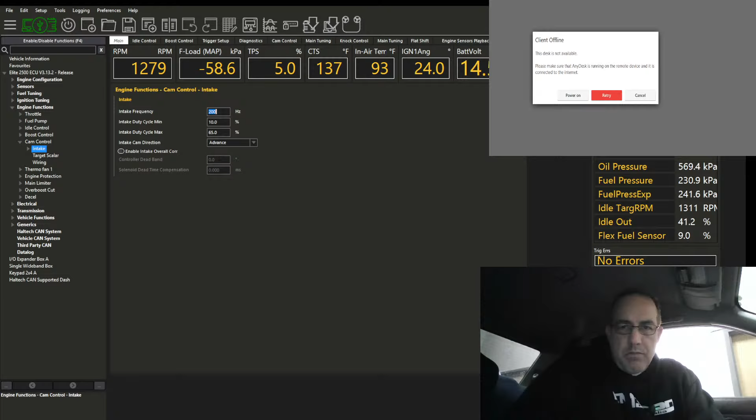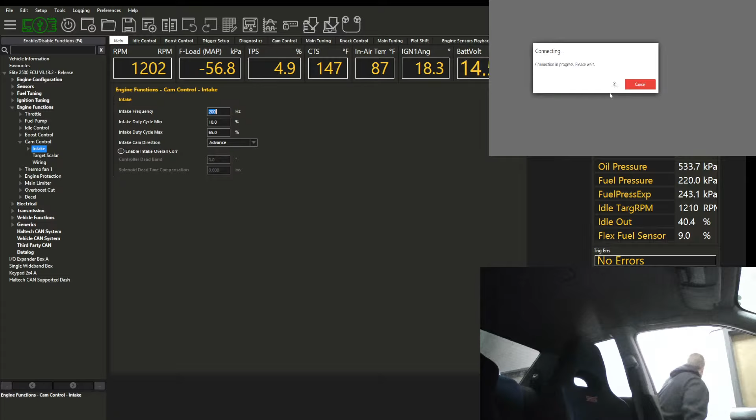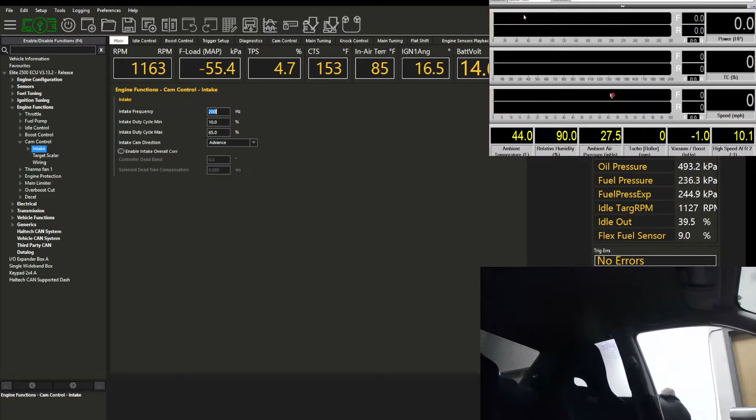All right, let me get the Haltech fired. Oh, it's already on. Where is the Haltech display capture? Chrome M Tune. Here we go. Alrighty. And then Dyno computer, get that fired up. Woo! All right. Ah, shit. Chewy. All right.

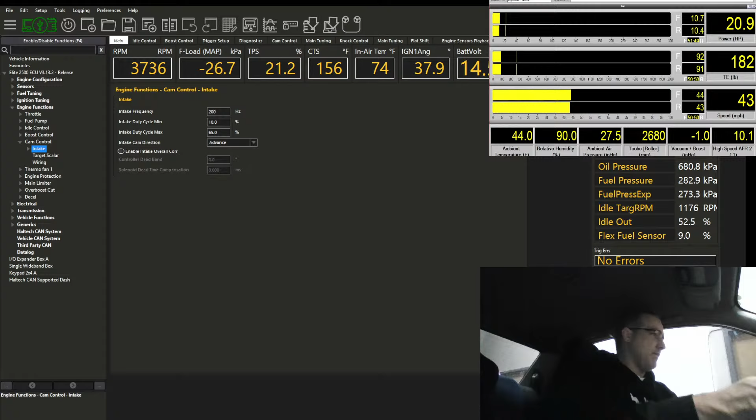Coolant temp's 167. Oil pressure is 90. Wow. 96. Okay. Oil temp's 145. So I appreciate the owner of this car buying all my parts. That was pretty nice of him. It runs pretty good. It's on a Haltech. You know how much I do not love Haltech. It's had some issues that are very Haltech-isms. I despise Haltech idle control. It just isn't where it's at.

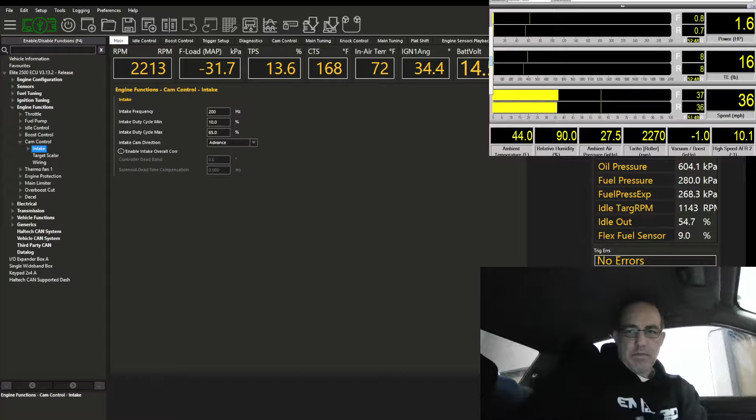We're going to do a speedo cal real quick. Okay. We set that in the dyno. Oh, it was close. All right. Want to look at the cam timing a smidge. I got it kind of high, I think, and that mid-range felt a little flat when I was accelerating right there. So I may have it just a smidge too aggressive right there, or it was hunting. I don't know. So I want to check atmospheric here, 80-25. Like bad. Might have just been to 5. Okay.

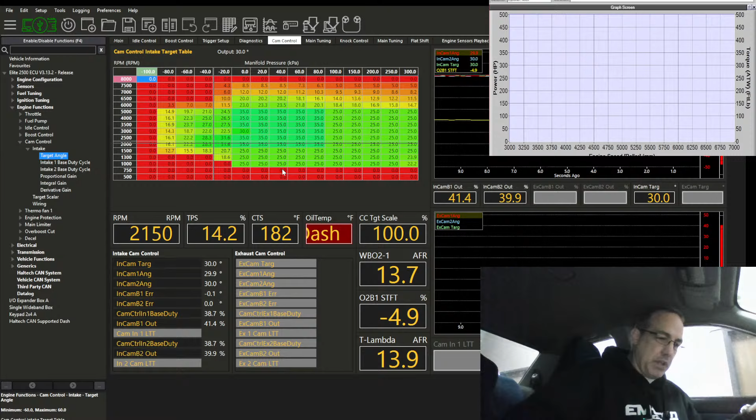9%. Okay, so we're on 1700s right now. ID 1700s. Not the new 1750s, just the older 1700s. It's fourth, right? Yeah. It's got the CAE shifter, which I'm not a fan of. This one at least is installed really well, so I give him big props on that. He did a good job with that, and it shifts the best of any of the CAE shifters I've ever had the displeasure of messing with, because a lot of them just don't do well. I know you got to really set it up right, but even then, there's something missing. But this one's actually the best one. It looks like it's the newest version though, so perhaps the other ones causing problems were the older version. But anyway, so here we are.

I'm gonna do a light pull. Dyno's grabbing it. We do a light, low throttle pull, just see how the air fuels are through like 2 to 4 pounds. It would help if I remember to turn off the rev limiter for braking. Turbo is loud. Okay, so we were adding some fuel in there. It was at 10% fuel right here. That means those can move some air for sure. I got 8 pounds-ish of boost here, and we're at 4,000 with 35 for my intake. So a lot of overlap right there, and definitely a positive pressure ratio across this thing. It's just blowing a ton of air, so I would expect a high VE there.

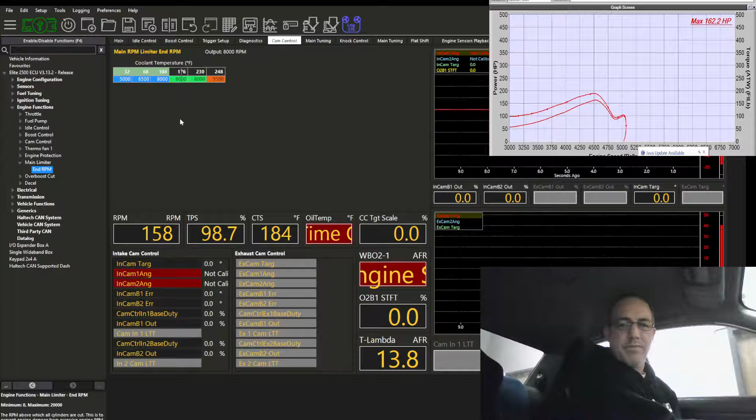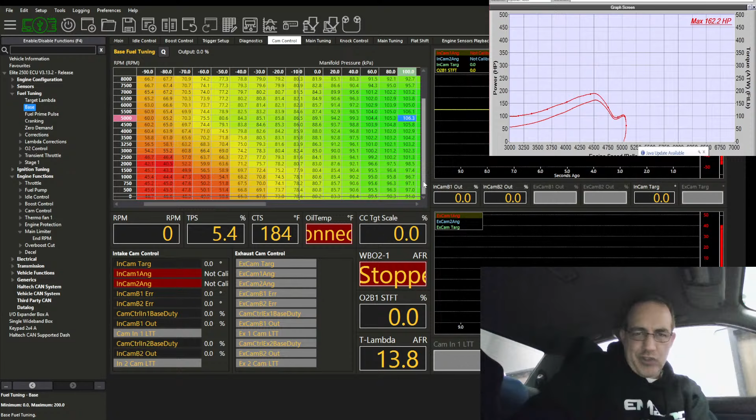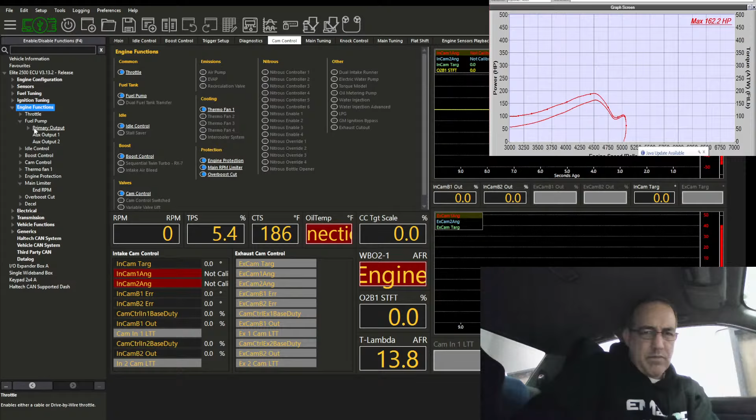Yep, something's happened. What did I mess up? Oh, sweet. What else changed on me? I'm in VE. That's right. On the VE map reference 300. Mm-hmm. What did I freaking run into while the car was bouncing? That's gonna be a fun one. Would have been that. I didn't go there. I didn't go there. Wait, try and see if the fuel pressure goes up. What are we doing here? Damn it.

Okay. Shoo. All right. Got it running again. I got to figure that out. And I don't know what I hit, but that's one thing that sucks with the dyno, right? I must have bumped something with all that action. What turbo is this? I forget. I think it's a G38 800, the new one. Let me double check. At this point, I'm not too concerned about it, right? 'Cause I'm not in the high power yet, so I don't always remember what they are. Yeah, G3825. Okay. Hey, Kenneth.

Alrighty. Now I gotta see what I messed up. I hit something when she was bouncing away, and I was hitting these damn arrow keys. I'm used to navigating with arrow keys, and that's not the case for this one. I wasn't in that menu. I wasn't here, though, for a little while. I didn't mess with that. I could have messed with that. Two banks, intake only. One solenoid per camshaft. 80. No, that's fine. How about here? That's all fine.

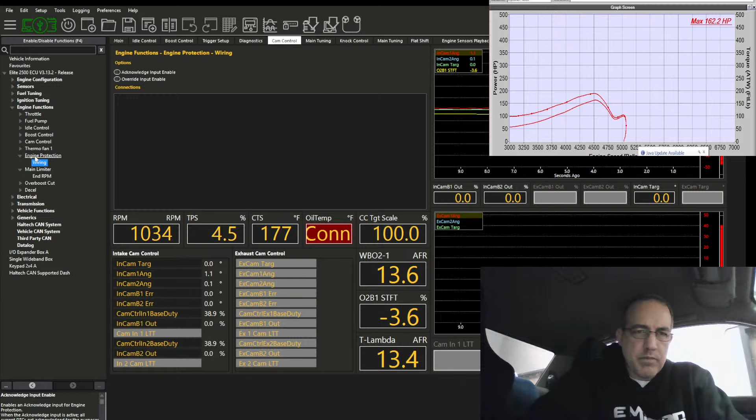So, check my check engine light. Drivetrain speed diagnostic. Okay, I don't remember doing anything there, but maybe I hit something there. All right, well, that's it for that. Let's just carry on. Whatever it is should rear its ugly head at some point, right? Or maybe I just gotta work on the hot start.

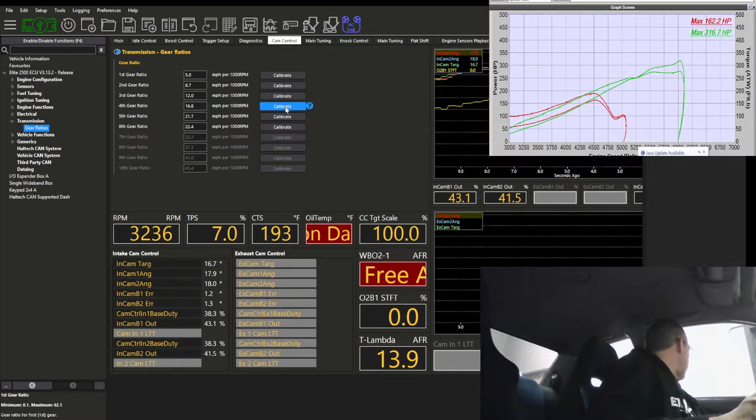All right, so my gear ratio is off a smidge. I'm gonna adjust that while we're here. We're in third. We calibrate that. Go to fourth. Calibrate fourth. Same spot. Boy, she woke right. Wow. Thing woke up. Let's go to fifth. Calibrate that. Still does not recognize I'm in fifth. The dyno's trying to do a pull right now because I'm going too fast. Wow, Haltech, you are not doing well.

It's still bouncing around. Wow. It feels like the center diff in this thing is toast. That's what that felt like just now. I don't think the center diff works in this thing.

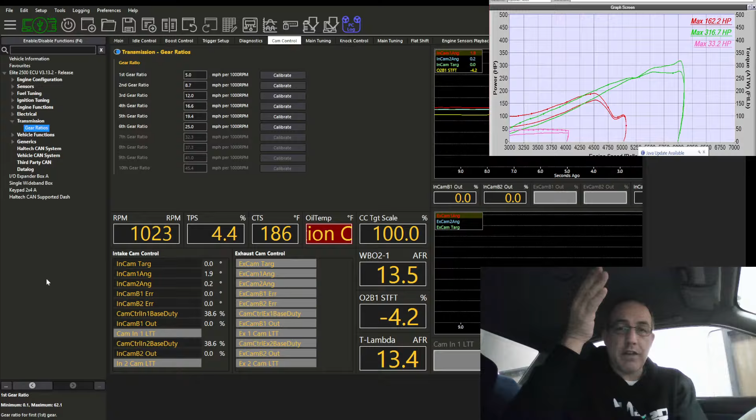I do like that. But it's glitchy because you click on it one time and it does something one way, and then another time it does things another way. Sometimes you got a log open, you double click on a parameter and it automatically throws on a trace. Other times you double click it and fucking nothing happens. Just magic. Sometimes it decides to work, sometimes it doesn't.

So that sucks. And then the fact that I can't use the number or arrow keys to go through here, that's dumb, that sucks. And then this whole gear ratio thing, not working at all. That's just crap.

I mean, I don't say at all, but the fact that it's bouncing around no matter what I put this one at means I potentially need to filter the input for engine speed or vehicle speed, either one, right? It could be RPM or it could be vehicle speed. Might need a filter. And then the filter, if there is an option for one, might take out some of the spikes.

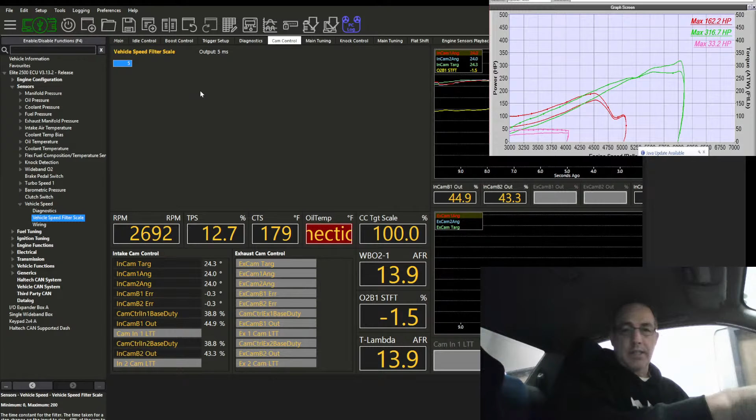Cams are following really well. Happy with that. Cams are following target right on, which is good. I spent a lot of time this morning working on that, trying to get the cams to follow the target. Another thing, I don't like cam control in the Haltech. I don't like how they auto calibrate, especially with the Subaru, because the Subaru has this thing where it will frequently change the phase of the cam sensor. It's some weird thing that they do.

I need to take this off of sample. I don't want to sample. Let's go here. Oh, load. Okay, fourth gear is stable on the screen. Fifth gear's not reading. Still not reading. Yeah, so whatever. It's just more Haltech bullshit.

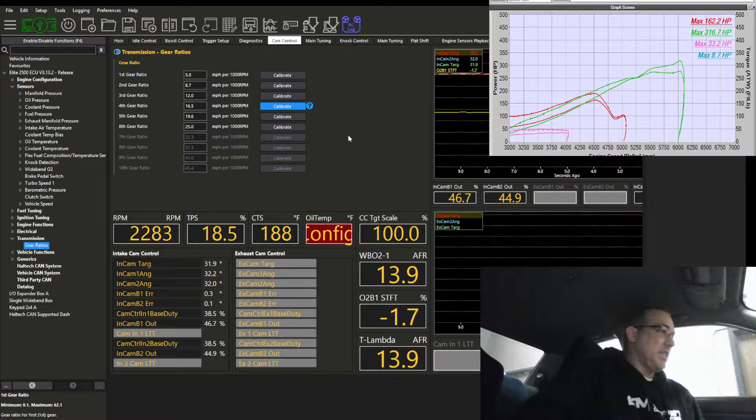The speed looks like it could use a little more filtering though. Let's try that. Maybe a little more filtering. See, I'm gonna do a big change. 20% load is a little much for this little engine right now. Yeah, see, 2 and 3 are jittering. 4 is steady. 5's jittering. 6 is jittering. All right. Go bigger on the filter.

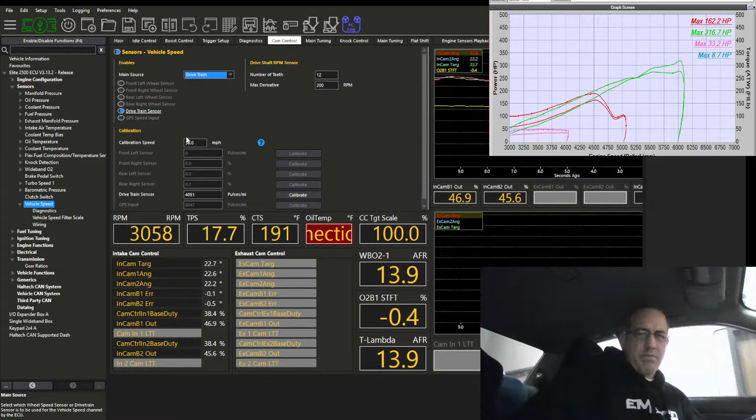Get a little engine brake in while we're here too. Gonna lower this down to 10. Okay, 4 is reading. 5 is not reading. The speed is still pretty jittery. I set this at 30 miles an hour and double check the calibration on this too over here. Speed 30. Okay, up against that. Okay.

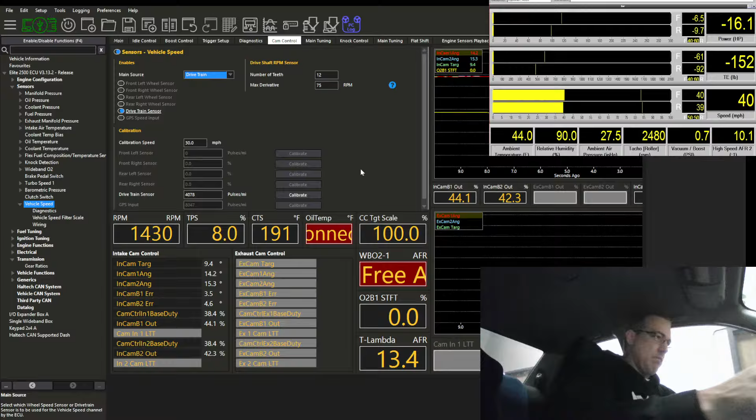Let's make that longer. No, wait. The maximum derivative. Let's go with 75. Okay. And I'm going to turn off my speed control, go back to load, set this around 10. So come back and try and see if the gear works any better now. It's more stable. Wait, what gear was I in? This is third. It told me the wrong gear. It lied to me. Third. Okay. Oh, now it says second. Now it says fourth. Let's calibrate fourth again. Okay.

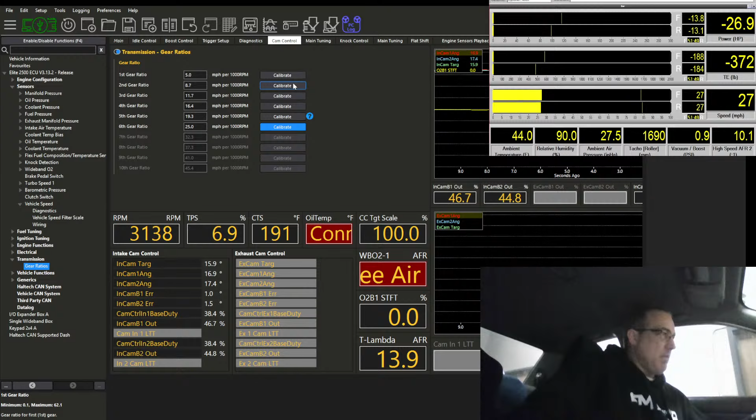Let's do fifth now. Nothing. Sixth. Nope, it says fifth. Do second. Rolling downshift into first. Nobody ever does that, right? First. First works. Second, for first doesn't work. Second to third doesn't work. Fourth gear kind of works. Fifth gear doesn't work. I mean, if I filter this anymore, it's going to be over a second. All right, 900 milliseconds.

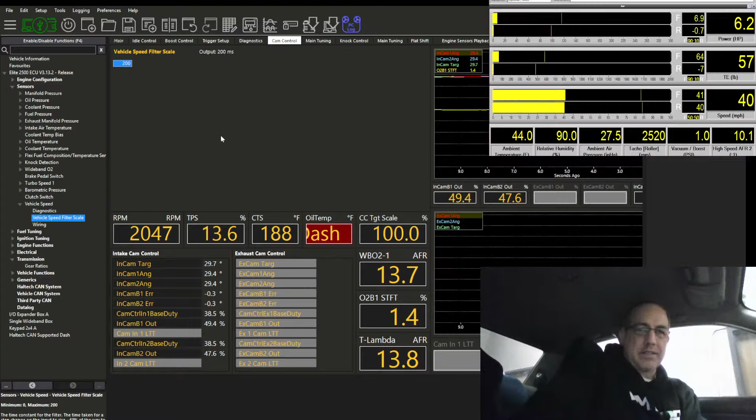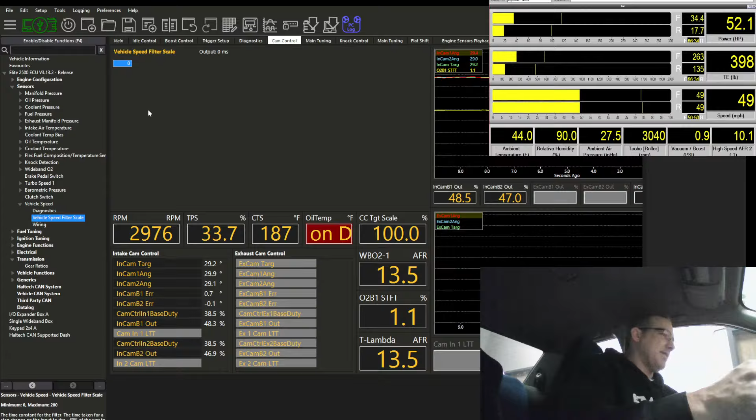Third. Nope, says second. Oh, 200 is the max. Yeah, 200 is the max. 0 milliseconds. Nope. Not working. Nope. I killed it. I killed it. Was I in gear? No, I just killed it. Man,

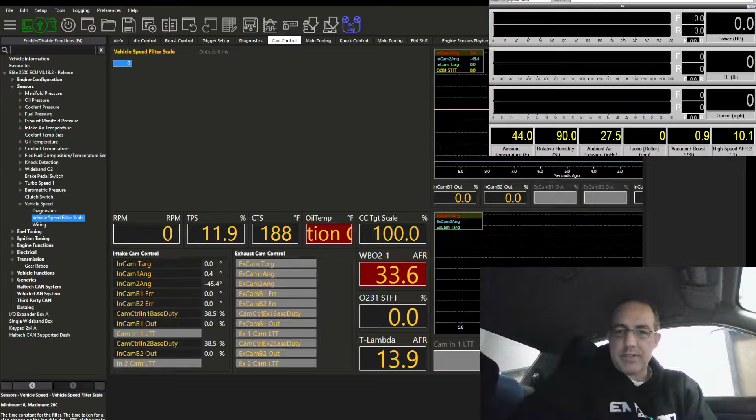no. Do you like the layout overall? No, I do not. I do not like Haltech at all. Like none of this software do I like. I hate the layout. I hate the fact that every time I open it, even if I change something, I gotta reset my gauges, even though I've saved them. I hate that stuff disappears off the screen all the time, like this crap. I gotta hide this, and then I got to get that back. But I don't want that. And this pops up on its own. I don't want it to fucking pop up. I don't want to see that shit.

Cam sensor, not detected cam sensor. Yeah, that's the other problem that he's been having too, is the cam sensor. Like I said, another Haltech thing. Cam sensors just stop reading sometimes. Fuck, it's so annoying. All right, so unfortunately, this sucks balls. So it died because it didn't see the cam sensor, so it didn't get home signal. So what we can do is I can set my trigger so that it doesn't care about the home signal after the engine has started.

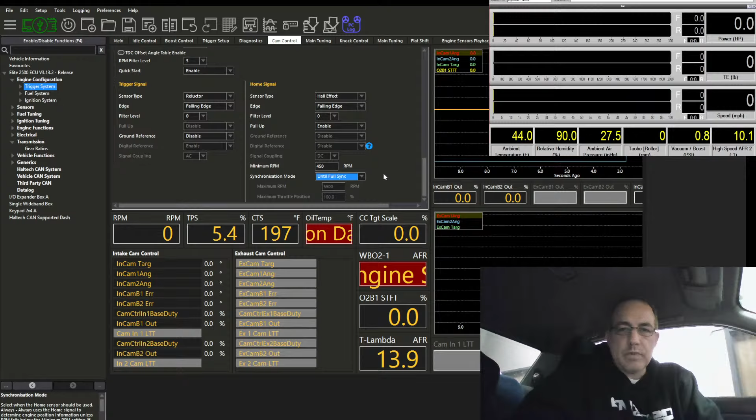See how here it syncs always. We don't need that. Yeah, yeah. Can do that. Now, this will stop it from going wacky on me. You probably choose one filter. Maybe one filter might work. We'll see if that works or not. And then it says minimum RPM is 450. I feel like I want it to be a little lower. Let's go 350. Like that. Hit that again. Okay. No cam trigger.

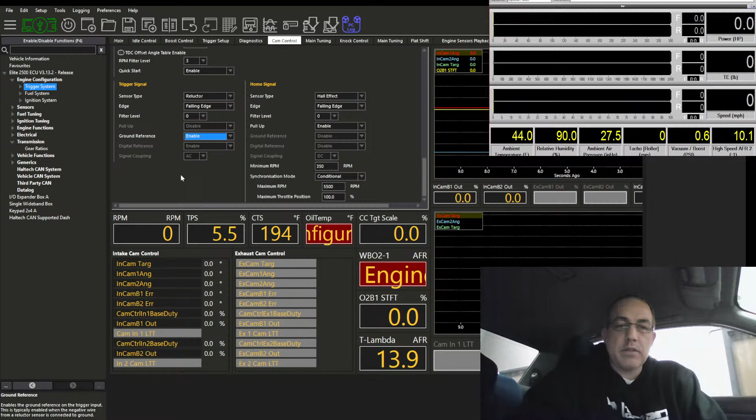Boy, something's angry. Oh, look at the cams dropping out again. See that right there? Cam signal dropping out. Conditional would be nice, but that puts an upper limit on it. And the problem I'm having is at the lower RPM, not the upper RPM. And sometimes you'll get it up top. This actually should be enabled there. That should be enabled there. Unless they wired it funny. But usually Haltech, they run that to ground. All right, so there we go.

What the hell now? Bank one not detected. Okay, so I've lost both of my cams, basically. Ah, that's so annoying. So annoying. Oh, my fuel pressure's lagging.

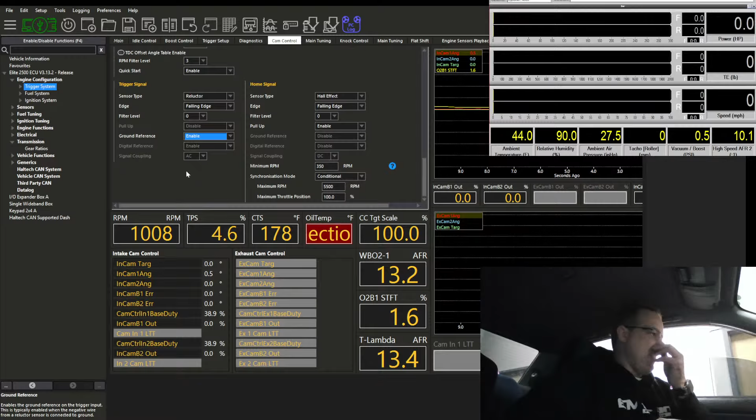Okay, I think we're good. The oil cooler is not working as good as I would like it to. It's currently at 210, and we haven't even been doing much to it. Fans are running, they're on it. Well, they're not on the cooler itself, they're in the engine bay, and the cooler is also in the engine bay. I honestly don't understand the way the cooler's set up, because it's just sitting in the engine bay.

I don't know if the owner plans on putting a scoop on it, or maybe there's a fan on it or something. I don't know what the plan is with that part. I should ask him about that, because the oil temp is much higher than coolant temp. Okay, and because of that, pressure started to drop. It's good now though. I'm gonna see what fuel pressure regulator this thing has.

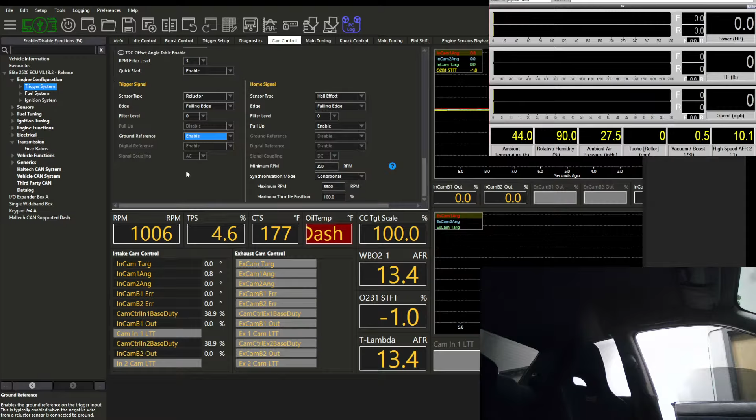Oh, it's got the Radium too. Man, I hate that thing. I need to hold this hood up. Okay. When you turn the key off, this fuel pressure goes to zero like that. It just drops off. And so if you don't start the car during the crank prime or during the fuel pump prime, you're screwed because fuel pressure falls off too quick.

Or alternatively, when you crank on it, the pressure takes a while to come up on this thing. It's like... and comes up. So I've been telling people for a long time, stop using those Radium regulators. They suck. I like Radium products, but their fuel pressure regulator is garbaggio. It is so bad.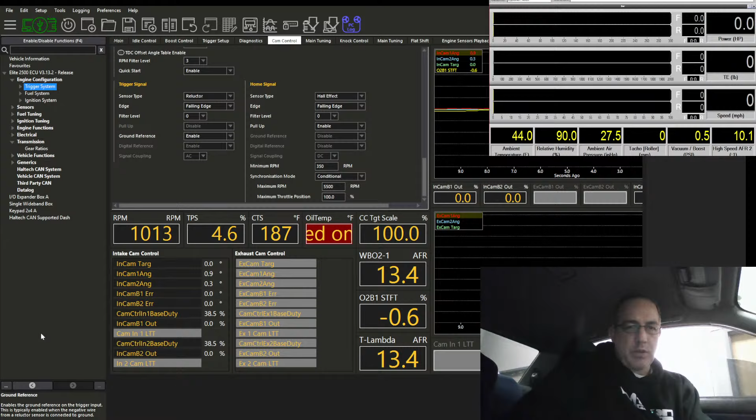Okay, oil pressure starting to come back up now as oil temp drops. I opened the hood, put a little thing on it so that the air can get to the cooler, and it looks like it's helping a little bit. So that's good. So let's see how this works. Let me go back to my chat here.

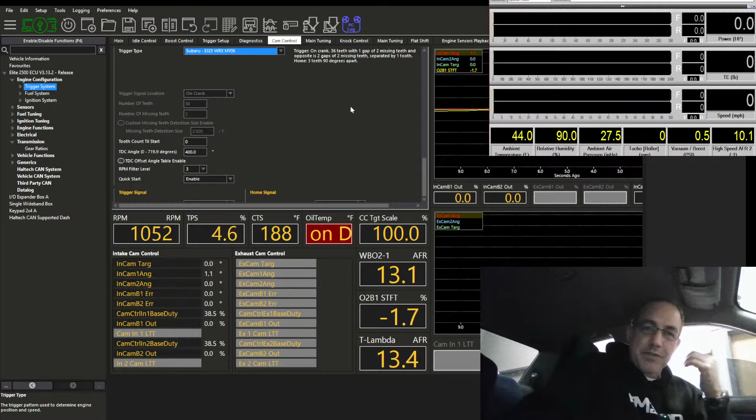What's up, guys? Hey, Mark. Haltech is angry. Haltech is crap. I don't want to talk trash. Tired of talking trash. Trying to be positive about stuff. But when you struggle because of a system being poor, it's frustrating and it makes you angry. So I get angry because it's far less than ideal.

Okay, so vehicle speed works, gear indicator doesn't. It kind of works. And unfortunately, I have nothing else that I can do to make it any better. So the owner is SOL on that one.

Oh, the heater was on. No wonder I was baking my balls off in here. It's 40 degrees outside. I didn't realize the heater was on.

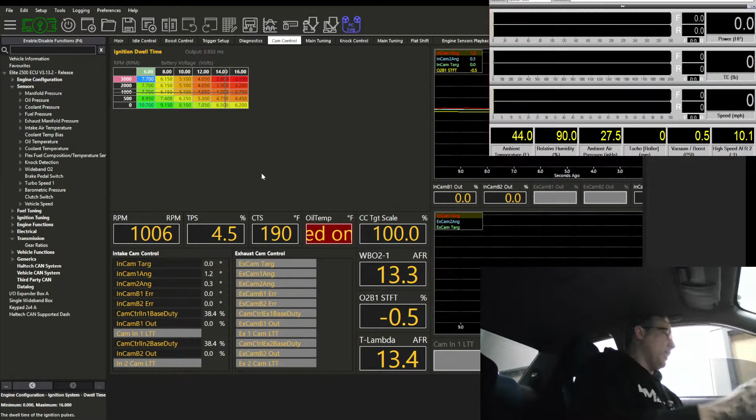Okay, so I'm gonna just abandon that now. Cams seem to be tracking. They do fall out at idle sometimes. Hopefully that can be okay. But let's go with another low boost pull. Oh my God, I'm sorry. I made them the same. Okay. All right. Take it over to the dyno. We will do a low boosted pull again.

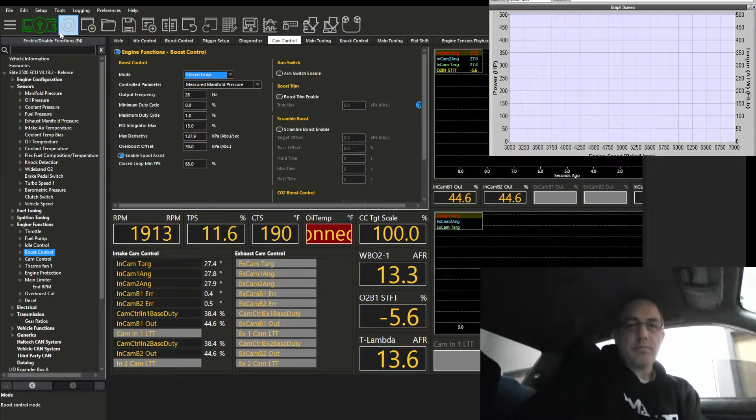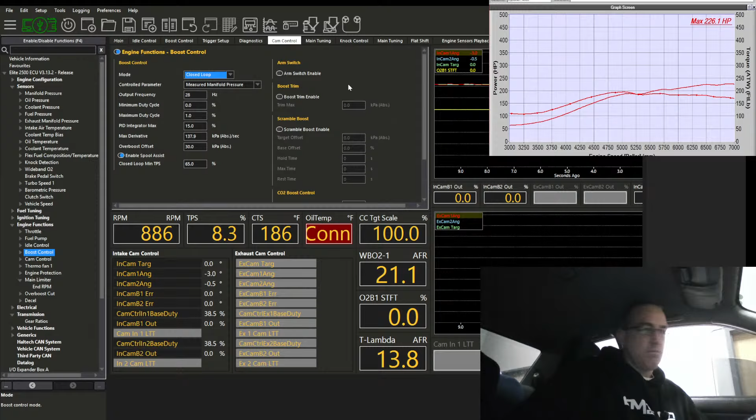I hate the logging on the thing too. I fucking hate Haltech logging. Okay. Oh, losing it again, huh? We good? Car?

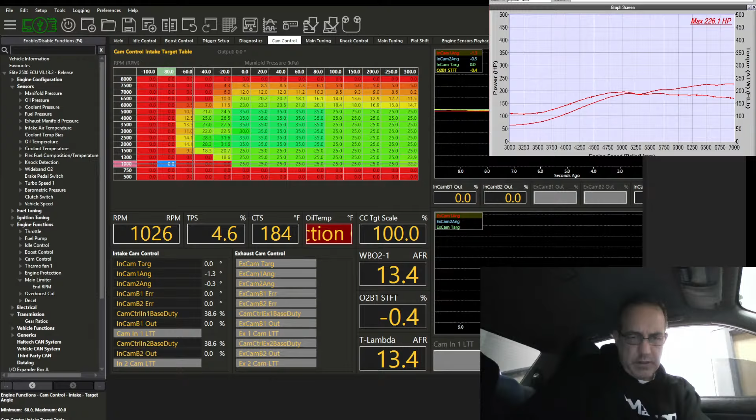Log viewer time. I don't think I have that capture for you guys. Let me bring it up. I know I told it to do it at one point. Here we go. There she is. All right. So usually, if I double click on something, it should plot it in a trace to the right. So, let me just find the thing that I want to plot.

It's in here somewhere. Okay, we'll start with RPM. Come on. Two clicks. Nope, not this time. This time it doesn't let me do it. So annoying. All right, manifold pressure. Oh, that went to new trace. Okay, that's good. And that manifold pressure was what?

65 kPa, and I was letting off on the throttle a little bit, so 8 to 7 pounds here, 9 to 7 pounds, somewhere in there. Yeah, 8 to 7. It's for you metric or SAE peoples. I hate what they call it. This guy, Wideband O2 1. 79, 78, 77, 78. Okay. That looks good. What's my target though?

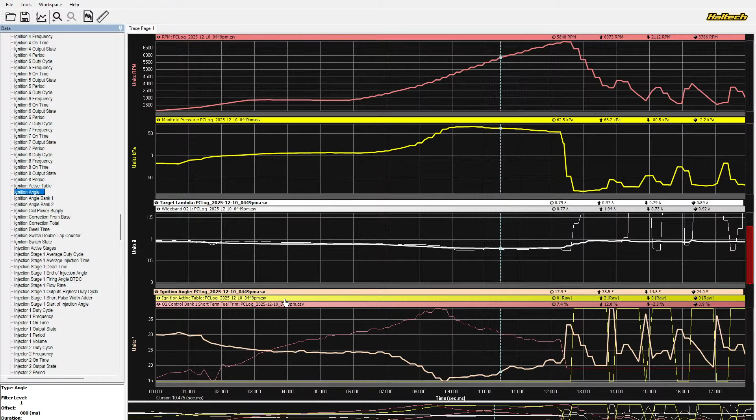I want to look at my ignition advance. I want to look at my ignition angle overall, this guy, and we're going to put it on this table. Why does it keep changing on me? There we go. Remove. There we go. All right, so timing came up to 14 degrees at this 8 pounds. So it's very conservative timing right now for 8 pounds, but that's good. That's what we want. Timing is 24.5 as we're coming in through atmospheric pressure. That's a little conservative for this engine, so I'll probably add 4 degrees through this area right here.

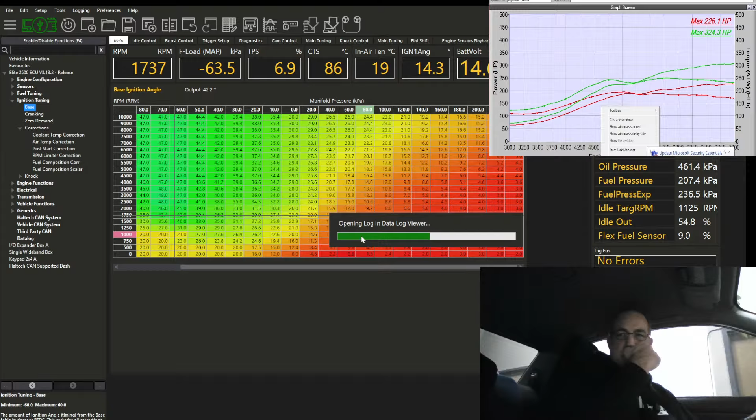Come on. You can do it. Lost sync again. Yep. Lost cams again. It's so annoying. I am going to put an EMtron in this tomorrow or Friday, and I'm going to test it because the cams just keep dropping out like this, which is classic Haltech, happens all the time.

But it's still stupid annoying, and I want to see if it's a Haltech problem or a car problem. So I'm gonna plug an EMtron in this on Friday and see if the cams track. And then I'm gonna enjoy a good solid hour of tuning that just works. Unless the cams screw up. If the cams screw up on the EMtron too, then obviously there's something wrong with the car.

Whether it's some of the wiring modifications that he made, because he changed some wiring stuff with grounds, or what, I don't know. But I got to try something else because the guy's not gonna be happy with this. And he was mad at me for saying that Haltech is crap, but this cam issue is like every Subaru almost. It's ridiculous.

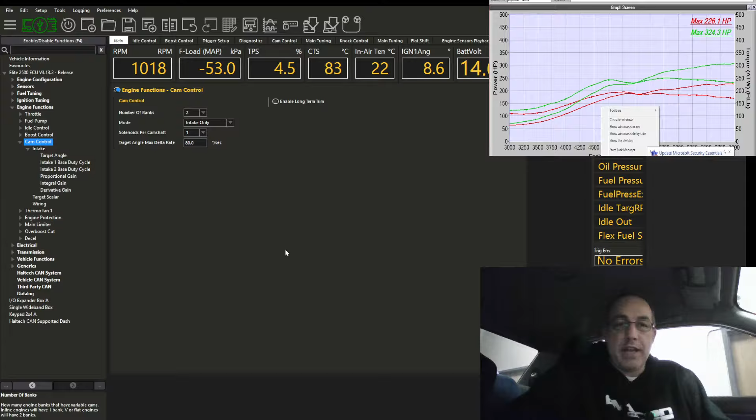But you can watch it though. I think it's on this page, right? I think it's this page. One of them, of course, this is in the way again. One of them shows you when it's calibrating the cams. I think it's this page. Let me see. No, it's not on the screen. I think I have to add it.

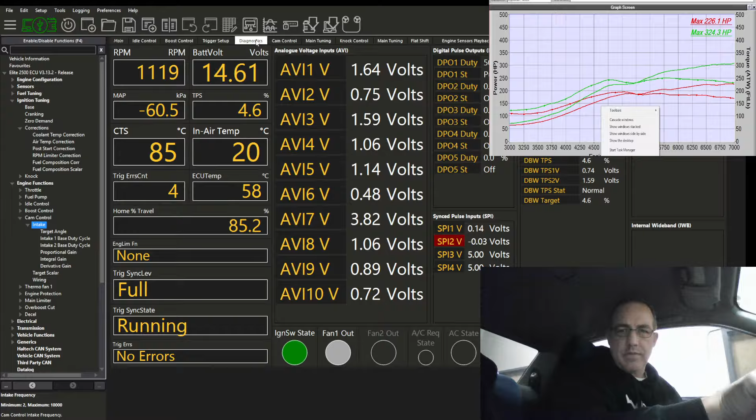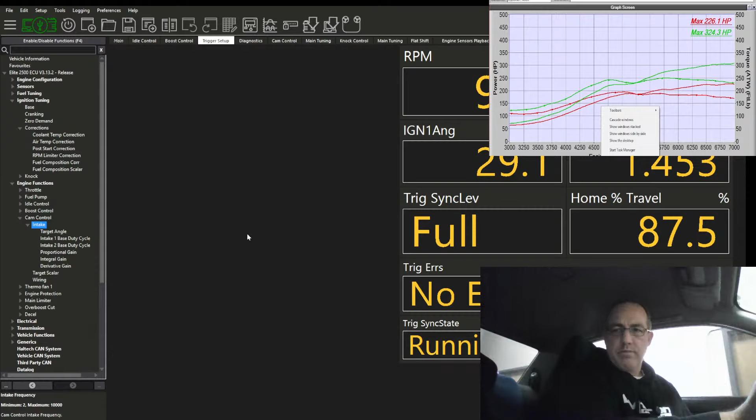I think I have to add it. Let's see, unless that's one of these. It's one of them. When you click on it, it brings up another window. And it's diagnostics. This one. It's one of these. I gotta find it. This one? I don't know. No, I don't know what screen it's on. Like I said, I may have to just redo it.

Anyways, one of them, it says calibrating, and it goes through and measures where the cams are at. But when that sensor moves, the calibration goes out of whack. And you can see it here. You watch it here on this window, all of a sudden the cam will go boop, like down to nothing, or it'll pop up really high. One of the two, based on what side of that phase change we're on.

It'll either all of a sudden go, whoa, okay, we're 30 degrees one way. Because it changes, I think 30 degrees is the distance, if I recall correctly. They go from like 60 to 90 as the last trigger before TDC. So before TDC, it'll go between 60 or 90 degrees, and then it flips out and thinks the cam is 20 degrees advanced, but then all of a sudden it gets another 30, so it thinks it's 50 degrees advanced. Or the other way, it's at 20 and then it loses it to negative 10 or whatever. And so you'll see this big swing in cam position all of a sudden as that thing changes phase. Like it happened by foot.

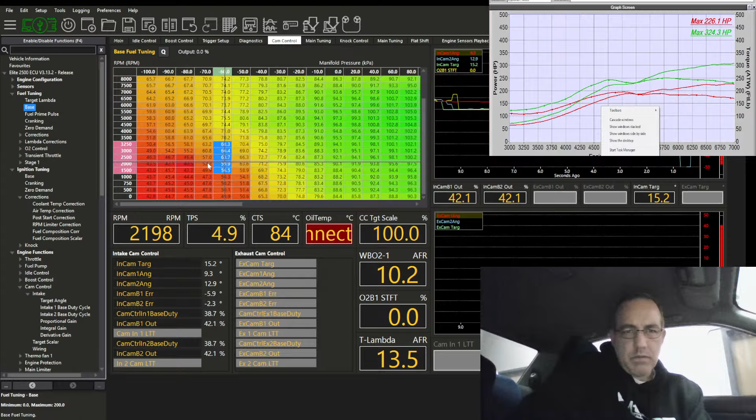Let's see. Oh, yeah, lean spot right there. Does not let me put just a tiny bit of throttle into it. Let me find that spot. Okay, it's right there. So this zone here needs more fuel. There you go. Oh, you see it. See that spot right there where it dropped off? That's where it changes phase and then loses itself. There you go. A little more throttle again. See if I hit that spot.

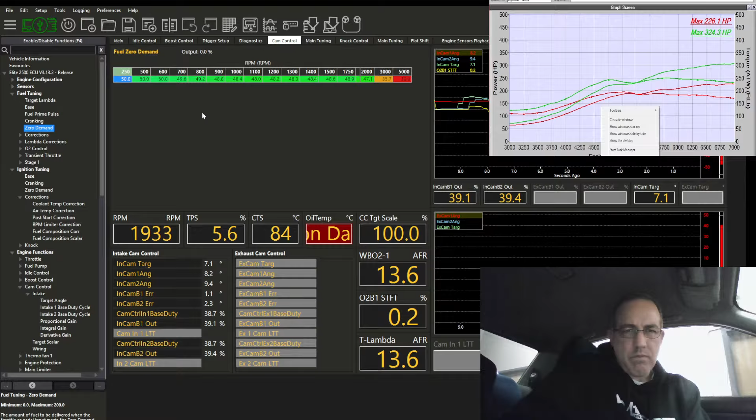Might still be in the zero demand map for some reason. I don't know why it would be, but see here? No, not actually in there. Oh, maybe I am. Let's give this guy right here. I shouldn't be in the zero demand because I'm giving it foot, giving it throttle.

So with that oscillation and the fact that I add a bunch of fuel right here and it's still oscillating, that means I'm probably in the low pulse width of the injectors because I am on pump gas right now with 1700s, and that's problematic. So I'm probably at the low pulse width of the 17s. I might even have my target lambda a little too lean right there. See, now we're at 13.9 as it comes up. So that might just be a little too lean as well at that light load.

Yeah, that's probably just too lean for injectors this large with that small of a pulse width. But see, now we're pulling fuel out. Not just added a bunch of fuel there, so.

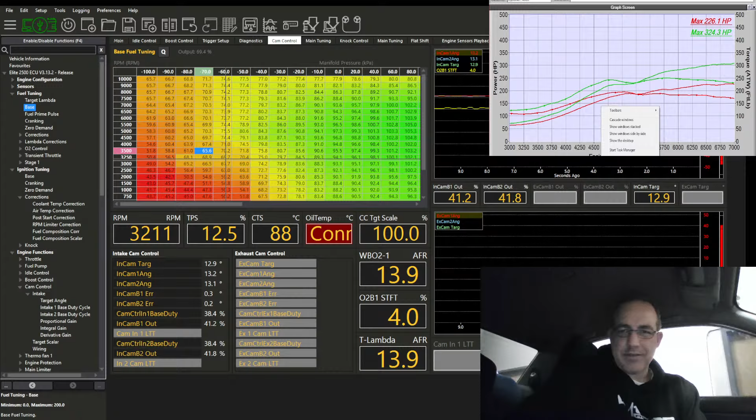Let's go back to this last log I did. I didn't review that log. I was trying to get the idle to stabilize. My rolling idle is a little too aggressive. You see how much it's adding idle as I'm rolling. So let me adjust that real quick, and then we'll do that too. For that log. Idle control, idle up.

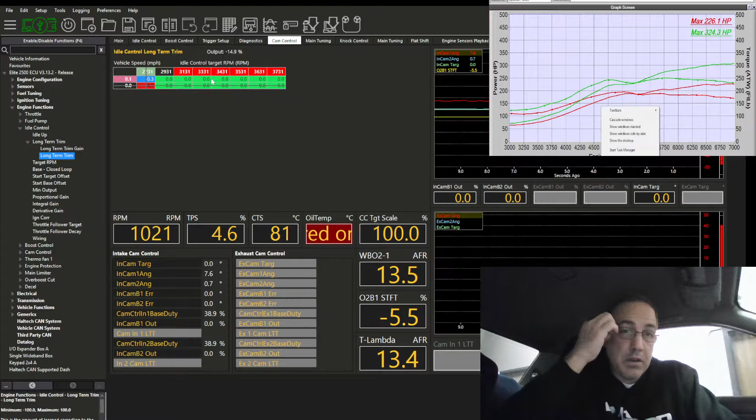Are any of these enabled? No, none of those are. Long-term trim is enabled though. Let's see what we got. Oh, that's interesting. I bet that's messing with it. Why is that a default axis for this table? That is crazy. And why is vehicle speed? Oh, no, okay, that's not what I'm looking at.

All right, so we're gonna do 800. End value is 2000. Increment, we're just gonna go 200, like so. And what's this guy say? Vehicle speed. Why would you want long-term trim based on speed? Hmm, maybe, maybe. Okay, what turns off? Okay, or make it 0. What's our gain? Right?

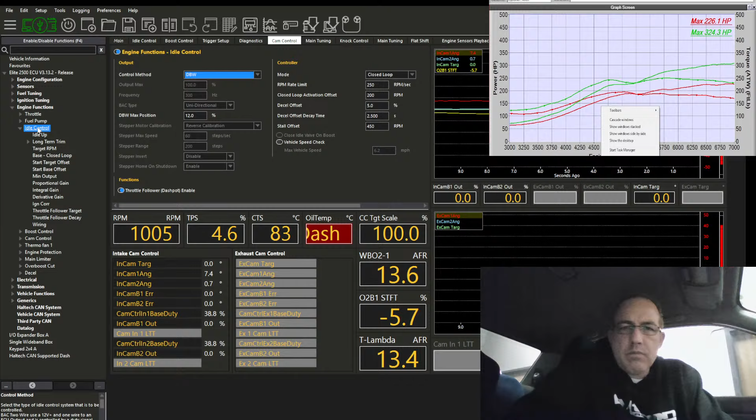Now that's throttle. I mean, that's idle percent, not throttle percentage. If that was throttle percentage, that'd be way too much. That's idle percent, which is a percentage of throttle, and which you can change. So here, 100% idle is 12% throttle, which is a weird thing that they do. So this would mean that this is 5% of that 12%, if that makes any sense.

So it's a little bit of decel offset. So it probably isn't that. That's probably not what's causing it, but it could. I don't have any idle up set here for power steering or anything, which wouldn't be a bad idea to add. Target RPM is based on vehicle speed, and you see we're adding about 100 or 200 RPM at 3 miles an hour. That might be a little high, so I'm gonna pull that down a little bit.

I don't mind adding some RPM when we're rolling because it helps compensate for brakes and power steering and stuff too. Like when you jerk a little bit quick or stomp on the brake and you change manifold pressure, it helps with that. Here's vehicle speed 2 as well, and you see here I got a little too much up there. Right here. Oh, that's not that bad. But we have this added to the other one, right? So we have two additions of idle speed.

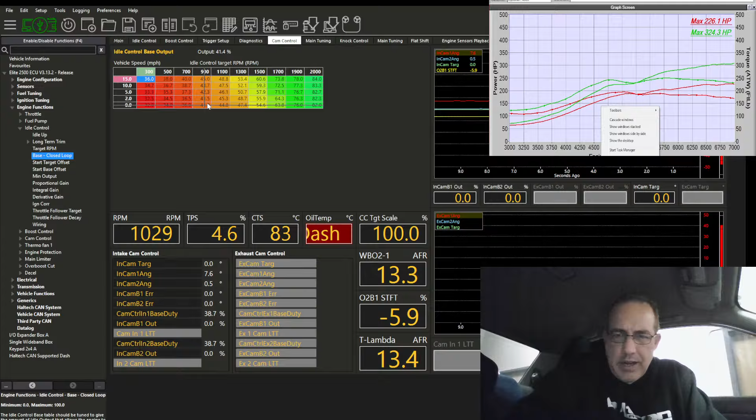And right now our idle out is 38%, and our minimum is actually 38 right now. So we're a smidge over our idle target because of that minimum being 38, but just a little bit over it. So we'll do that. And then we're going to go back to our base. Where do you go? Base closed loop. And this is 41. And it's good that that's high because that's where it's going to start when we rev it. When you go like this, it's going to come down.

It's supposed to, but why is it sitting at 51 now? That was weird. Oh, because I got the throttle follower on here. So the decay of the throttle follower, this guy was causing that. So we can drop this down. Like that. There you go. Much better. So the two of those combined should smooth out the recovery a little bit, as long as those cams stay reading. We got to keep our fingers crossed for those cams.

All right, now let's go look at that log. Bring that logger up for you, and let's see how that little small pull did. So here's the first one. I'm going to just close this tab there. Here's the second one. Okay, that's what we got in these two logs.

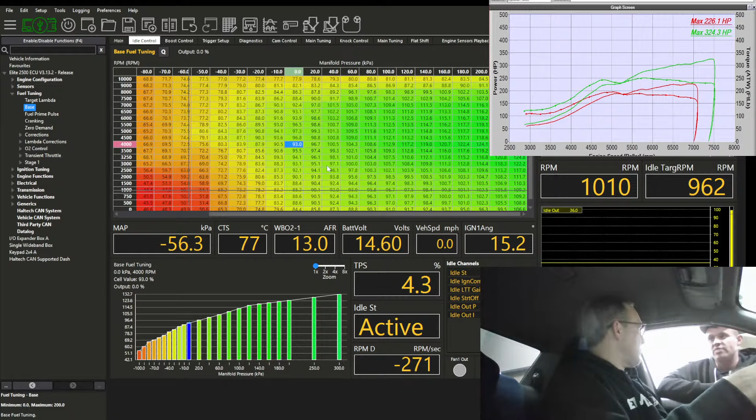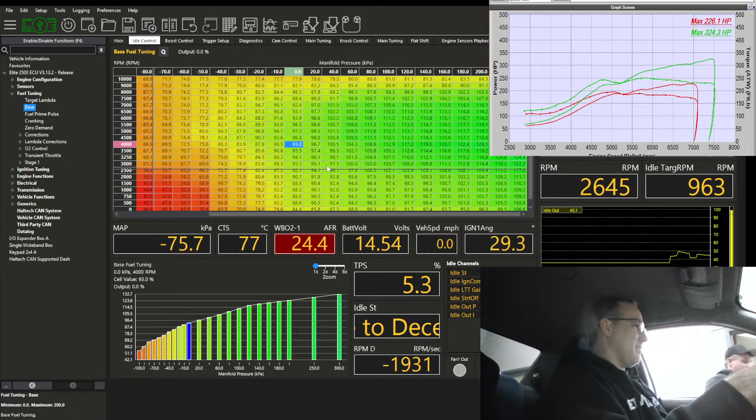That's fair. I just told it, here's my current weight. These are my goals. This is what I take supplement-wise. What would you recommend for hitting these goals? And it gave me good macros, good calories. And then when I go to the gym, I put in my weight, my reps. And what was cool is it told me what I should start at on my bench. Then I put in those numbers and it said, based off those numbers, at your incline you should be at these numbers. And it was pretty spot on. That part is helpful because I'm not guessing on machines right now. Using technology for what it is. Sounds pretty sweet. I'm pumped.

With the hood popped, the oil temperature dropped to 168. So when he gets a scoop on that thing, it'll be effective. But with the hood closed, it was not effective. That was bad news. All right, let's try this again. Let me check my chat really quick. Like Haltech rants. All right, that's the last time we saw. Let's do this again. F6.

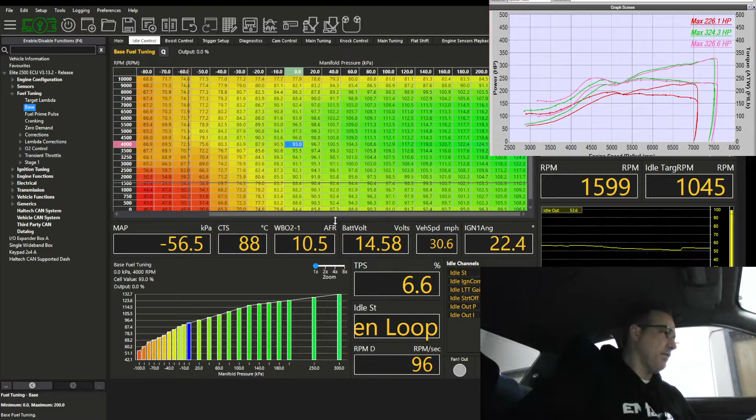Okay, rolling idle significantly better. Oh, there's a little flare right there, though. A little weirdness. Okay, this DCCD in this thing is toast. I gotta change the dyno setting to a more aggressive speed control because this DCCD is not happening. I'll have to tell the customer that it's toasty. We'll do this one. Usually gives us a really aggressive speed control between the wheels and tires.

All right, a little dip right there. I was partial throttling, gave it full throttle right here, so that could be that, or it could be cam timing. Could be a reduction in cam timing. That is at 52, so I could be dropping the cams really quickly right there, which would cause a dip if it's too fast, or I took too long to reduce the cams. Back pressure's coming up and the cams are too advanced right there. Or since the boost is coming up there, it could be that the timing's really low, which we'll find out when we look at the log. So we're gonna log it for you guys.

DW, people still here, we're just not chatting. I don't know what DW stands for. Oh, don't worry. Don't worry. Right.

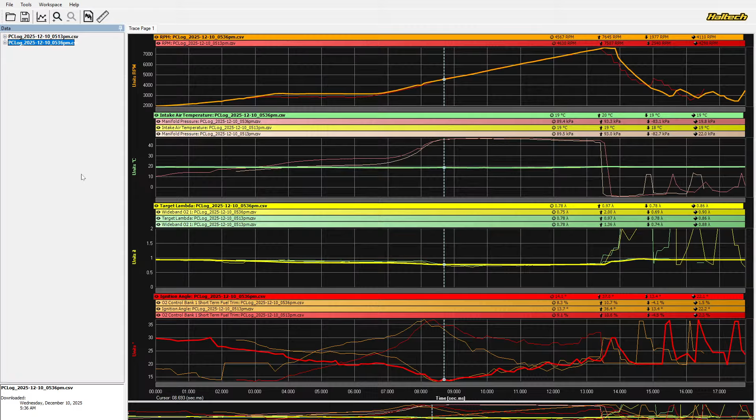All right. So let's go back. I want to get rid of this one. I'm gonna pull this one off. Both. Yes. And I'm gonna add this one to the existing traces. Boom. Ooh, that one was really close. That offset was really close because I started the pull pretty close to the last pull. Okay, that's cool. I don't care about the offset that much. That's not a big concern right now. I just want to show you guys that feature.

It is still adding fuel, but you'll see here it's adding how much? 9. Okay, so we're closer. Still 9%, huh? That's crazy. Feel like it should be getting plenty of fuel right there at this point. But it's not. So add 9% right there, 10% right there, 5% through here. All right, so pretty much 5% at 32. 32, 31 kPa right here. And that really surprises me, honestly. Yeah, hmm.

I know. Complain about high VE. Oh no, your parts work well. How dare they? I'm not complaining. I'm just surprised that it's working that well in that zone. Do that. Let's get this guy right there. That might be too much right there. I might have pulled too much out.

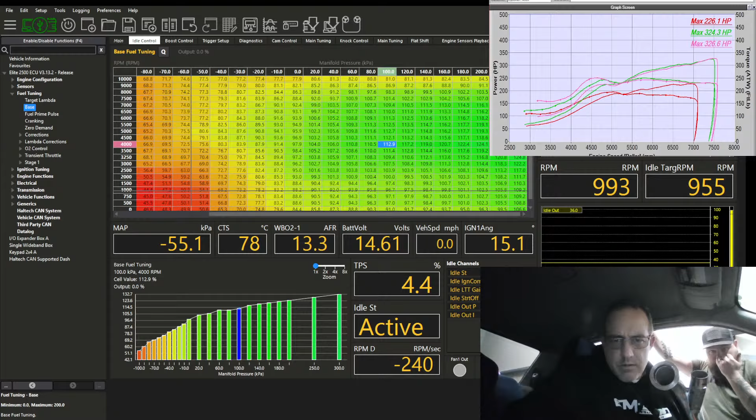3D printed stainless up pipe. Ooh, ah. See in there? See the wastegate to turbo transition in there. Nice split, good proximity. Yes.

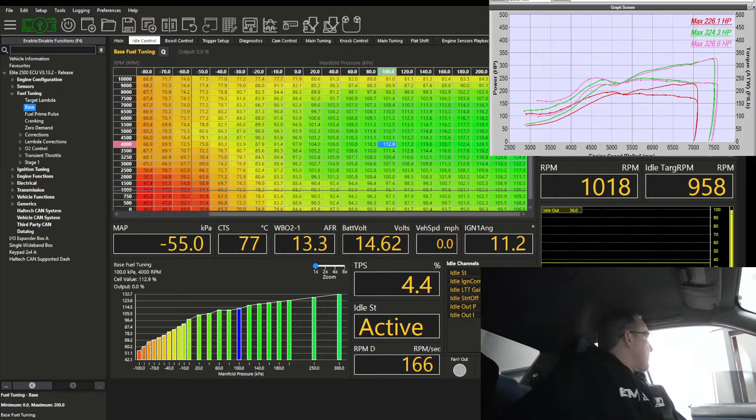What's the wall thickness? I think we did 100 thou on that. It's pretty thick. I think that's what we did. It might be. Ready to call it a night? Yeah, I want to do one pull. One more pull.

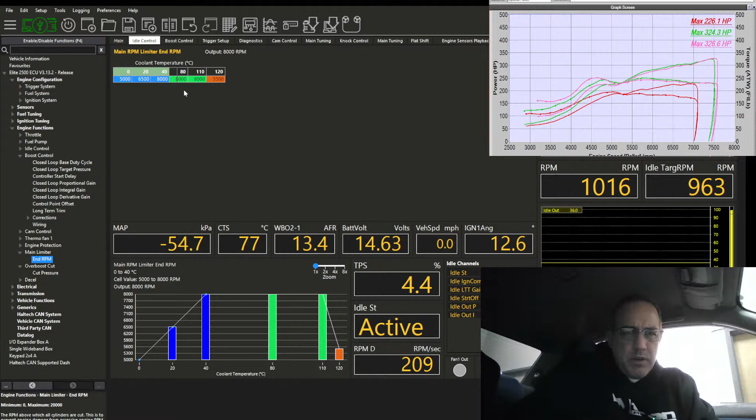Get that cut out of the way, because otherwise the cut will interfere with us. I want to raise the rev limiter. Nope, I don't. Eight's fine. I think I hit almost 8 in that last pull, right? Leave it there. All right. Yeah, man, when the sensors are working, it runs great.

They got to be working. What gear am I in? I don't know. I hate these shifters. And it doesn't tell me. It says I'm in second, even though we've calibrated that twice. Twice? It's like 20 times, right?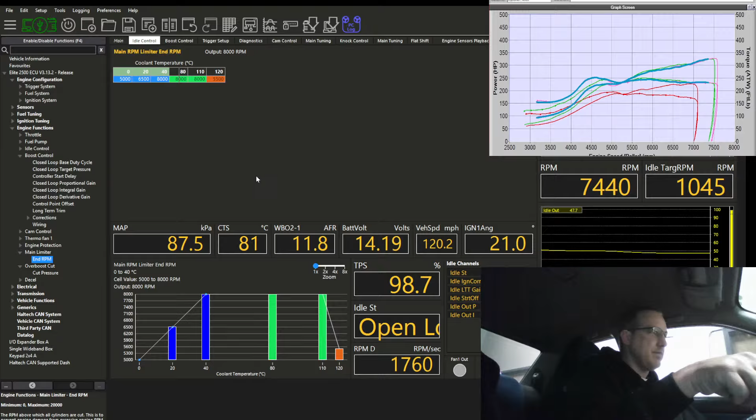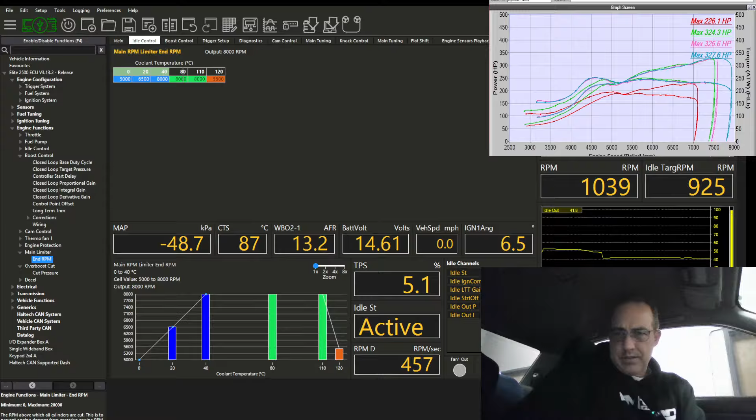Let's let it recover itself, see if it holds RPM or if it dies. Looks like it's doing okay. Touch the brakes. Oh, the gear position is changing a bunch. Okay, that worked out. Didn't die, didn't sputter. See, the cams are kind of wigging a smidge. Oh, you didn't see them, on the wrong screen for that. Okay. So take this one, remove that one, and then I'm going to add this one.

Hey, that thing's absolutely ripping. What did it hit? Freaking 327. 327 on wastegate pressure, which is 13 pounds of boost, on pump gas, and 14 degrees of timing. That thing's maxed out.

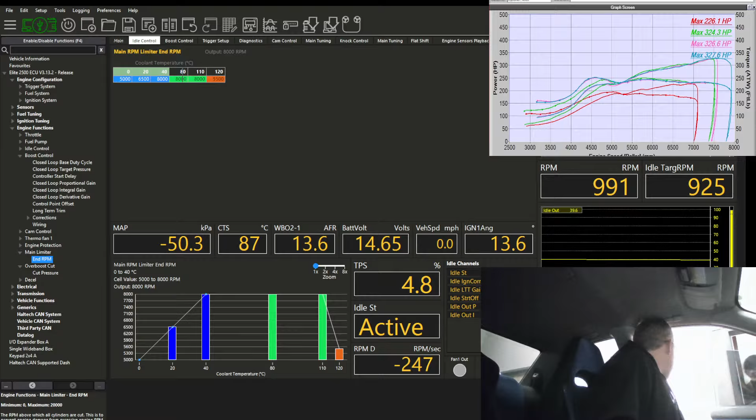You've been doing it with the back door closed because the wind was blowing it shut. No wonder it stinks so bad in here. I've been getting carbon monoxide poisoning. Well, there's a windstorm outside. Is it open right now? I didn't know it's shut. I just went out there. Okay. I started smelling it too, so I noticed that when you were doing it earlier. I opened it twice. Well, that sucks.

Well, that didn't work out, did it? I lost my log because I hit remove and it was the new log I removed. That's a shame. All right, let's see if I get it to work this time. See if this is the log. Should be.

So you need a little bit of fuel right there. Up top, a little bit of fuel up top. Over 7,000 right there. Around 7,000, 7,200. It needs a little bit of fuel.

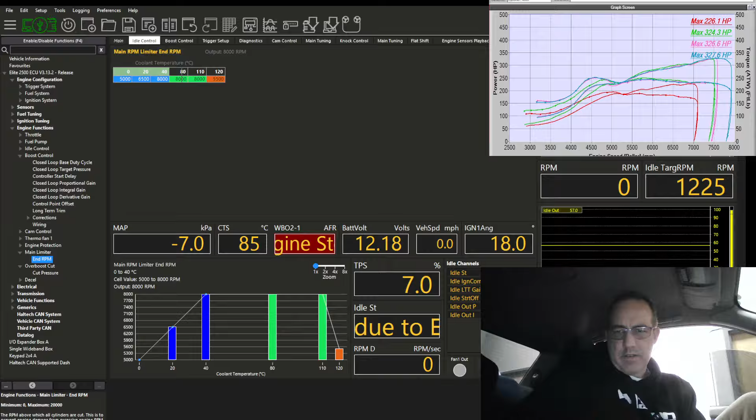They went from pulling to adding. So it's actually really close. Just needs a smidge right there. 2%, 2%. Okay, yeah. So we need to add a smidge right here at 7,300. Okay. Like that. Try to open this up for you guys. There you go.

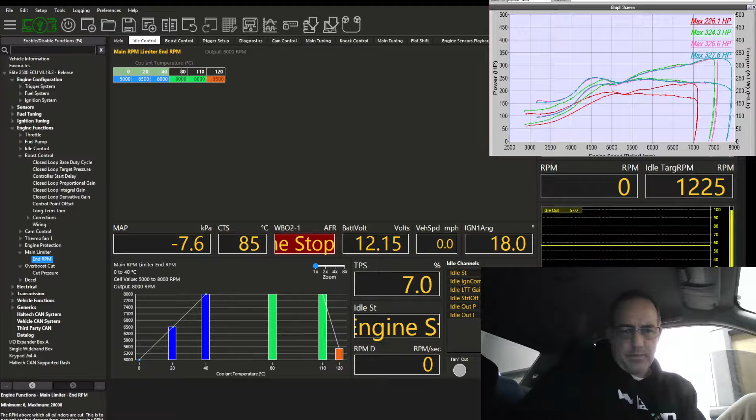Try for me a smidge lean right there on 92 octane. Or I'm just operating too close to the threshold. So we'll do this. And then do this. Oh no, I'm way below the threshold, so it ain't that. Could be because I was approaching the rev limiter. Let's see. But yeah, it says knock is way below the threshold, so I gotta raise my gain and lower the threshold anyways, but it's not even close.

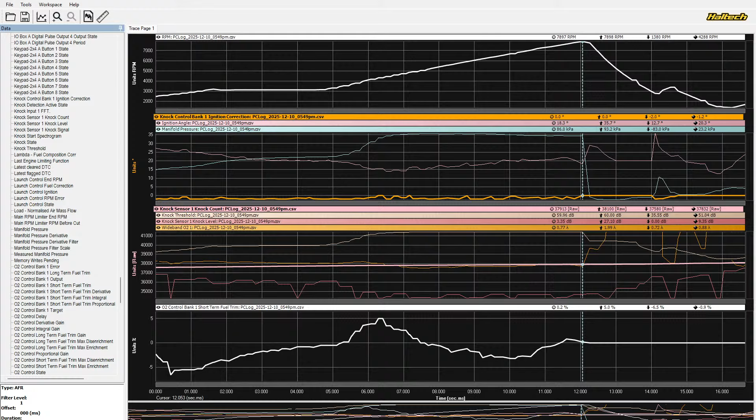Oh no, it was negative 1.6. Actually, it was pulling the entire way. Why is it pulling a little bit everywhere? Okay. So I gotta fix that. Okay. But that's gonna be it for today. Save that. I can work on cold start tomorrow. That's gonna be good.

I think the fuel pump's running. Yeah. Yep. It's weird. The pump's running, but the pressure says 0. It was when I primed it. Well, something's running. It might not be. It might be a fan because I hear it right now. And there's nothing. There's no pressure. Then there's that. Then there's another pump. So there's two pumps that come on.

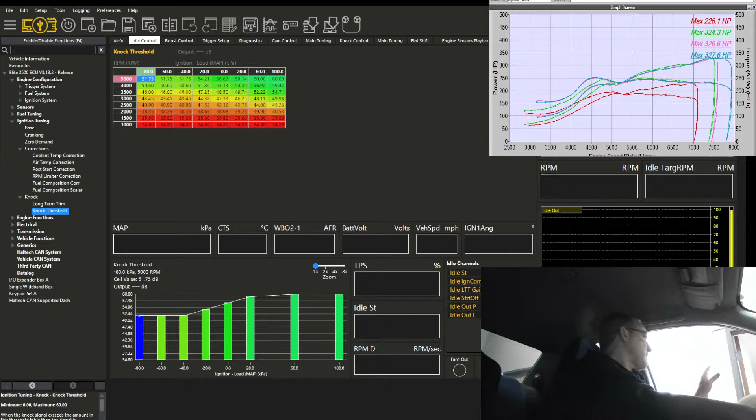No, no, no. This is different. No, come here. Come here and listen. Don't argue. Just fucking come here and listen. You are arguing with me.

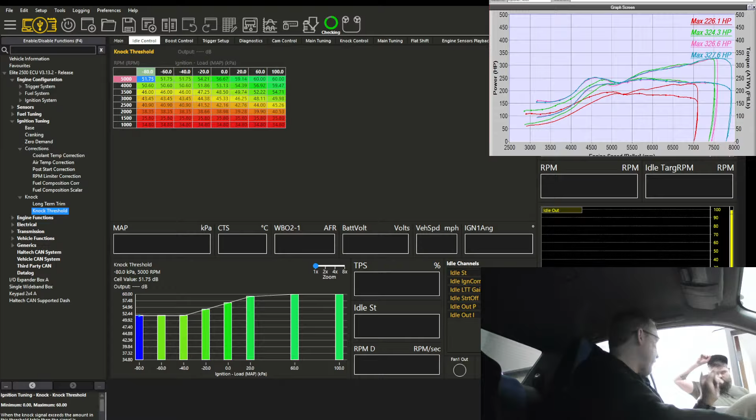Listen. Listen to the pump right now. Something's running. Hear that? Okay, but when I turn the key on, the second pump kicks on. Immediate clickety clack. Okay? That part's fucking weird. But this is what I'm curious about. What is that noise? That sounds like a pump or a fan. Makes you wonder if a pump's running backwards. Yeah, I think the pump might be running backwards because his fuel pressure was doing weird, funky things. So it might have one pump running fucking backwards, because there's no fuel pressure without the other one.

Fun fact about that. What? Chris Phelps's also sounded like he had LED taillights. It sounded like there was like taillights on. You know, like the fans for the LEDs. Yeah. So what the hell's going on with this fuel pump? And then not just that, but how did it not have that problem sitting there all night? How did it start for me today? That's a damn good question. Like, why did this problem just start? Damn good question. No, still doing it.

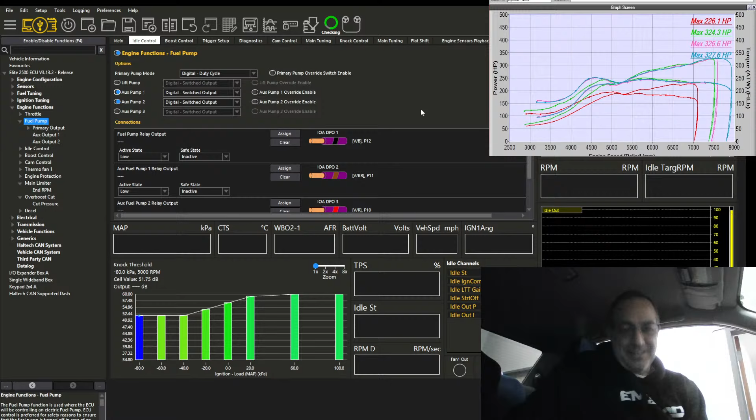Yeah, I don't know what it is, dude. Like, I turned off all the pumps and it still does it. No, you fixed it. But I didn't fix it by doing anything. Yeah. And then I cycled power a bunch of times and it stopped doing it. So I will definitely need to investigate what's going on with the wire and the fuel pumps because something's not right. You going, I cycled power and it went away? Yeah. The engine wasn't running. That's why the battery voltage was a little lower. Yeah, I don't know. I gotta figure that shit out.

So I hope that this customer changes his mind on it because I'd like to get into something that actually works, that feeds the data correctly to all the components and everything else. But